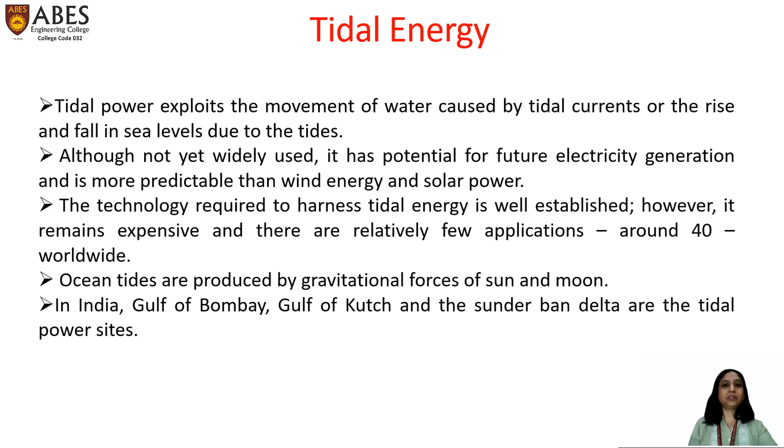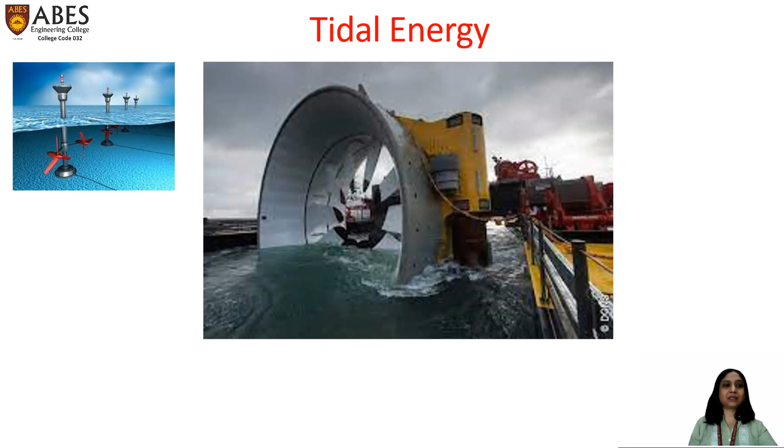The technology required to harness tidal energy is well established. However, it remains expensive, and there are relatively very few applications, around 40 applications worldwide. Ocean tides are produced by the gravitational forces of the sun and moon. In India, the Gulf of Bombay, the Gulf of Kutch, and the Sundarbans are the tidal power sites from where we can convert tidal energy into electrical energy. These are the snapshots. We can see the tides, and we are converting these tides into electrical energy.

As far as the advantages of tidal energy are concerned, very less area is required because they are on bays, and it is free from pollution because it does not use any fuel. Third, it is much superior to a hydropower plant, as that is totally dependent on rain, which always fluctuates from year to year.

As far as the demerits are concerned, tidal power plants can be developed only if natural sites are available. It is very costly also, as the sites are on the bay, which will always be far away from the load center, so the power generated involves more transmission costs. Tidal energy is very costly. The supply of power depends upon the timing of tides, hence it is not continuous. To solve this problem, a double basin with pump storage can be made, but it is also very costly. So in India we are not using it widely, but in future we can use it.

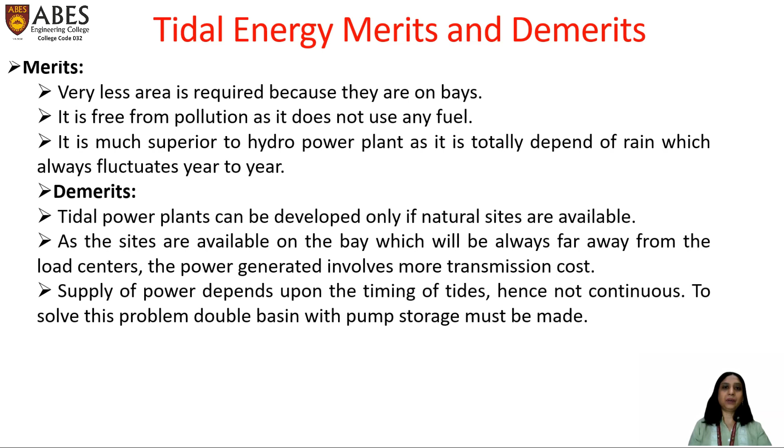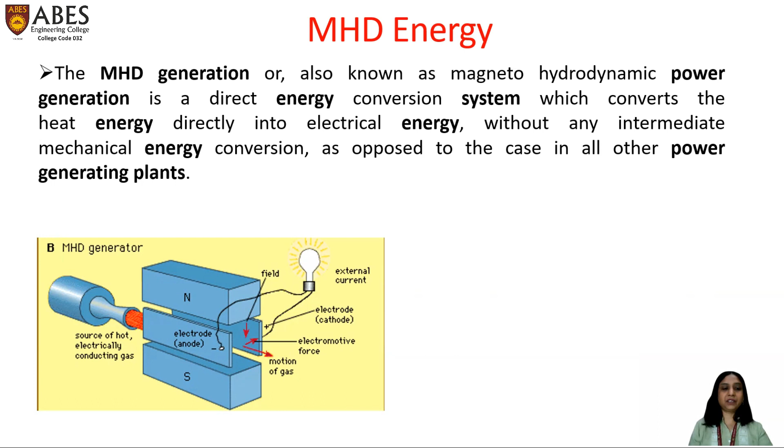The next type of renewable energy is MHD energy. MHD generation is also known as magneto-hydrodynamic power generation. It is an energy conversion system that converts heat energy directly into electrical energy. There is no mechanical device or mechanical energy conversion required in between, so it is very efficient. We can see here the snapshot of it.

As far as the advantages of MHD energy are concerned, as we have already discussed, there is no mechanical device in between. So this is one of the advantages, and it is more reliable. In an MHD system, the efficiency is about 50% as compared to 40% for the most efficient steam plant. As soon as it is started, it can reach the full power level.

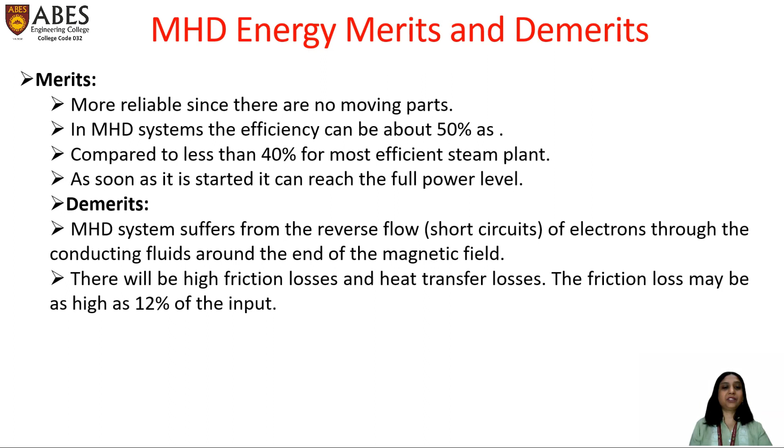But there are certain disadvantages also. It may have the short circuit problem. It may suffer from reverse flow, that is a short circuit of electrons through the conducting fluids around the end of the magnetic field. And there are also high friction losses, around 12% losses due to friction.

The next type of renewable energy is through the fuel cell. A fuel cell is basically an electrochemical cell that converts the energy of a fuel, that is hydrogen, and an oxidizing agent, that is oxygen, into electricity through a redox reaction. Fuel cells are different from most batteries in requiring a continuous source of fuel and oxygen to sustain the chemical reaction. Whereas in a battery, the chemical energy usually comes from metals and their ions, which are commonly already present in the battery, except in flow batteries.

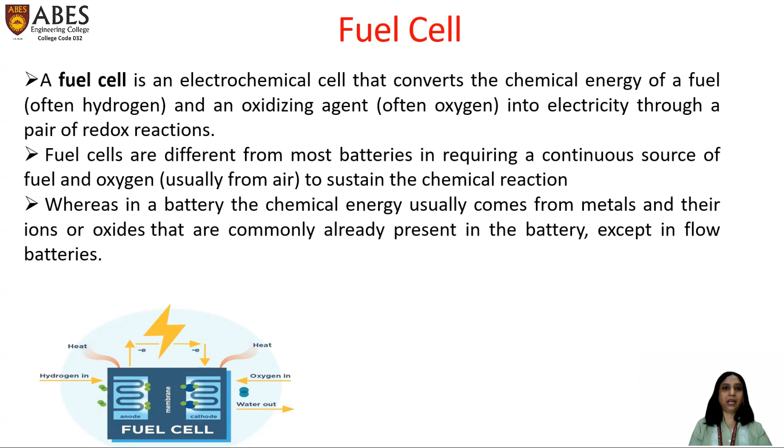So this is a snapshot of a fuel cell. We can see hydrogen is coming in, oxygen is coming in, the redox reaction is taking place, water is coming out, heat is coming out, and that means energy is coming out.

As far as the advantages of the fuel cell are concerned, it has very high efficiency, around 70%, since it is a direct conversion process and does not involve a thermal process. Fuel cells have fewer mechanical components, hence maintenance is also very easy. A fuel cell takes little time to start operation. Demerits are it has a low service life. Initially, the cost is very high. The use of fuel cells is still unsafe due to the explosive nature of hydrogen and oxygen.

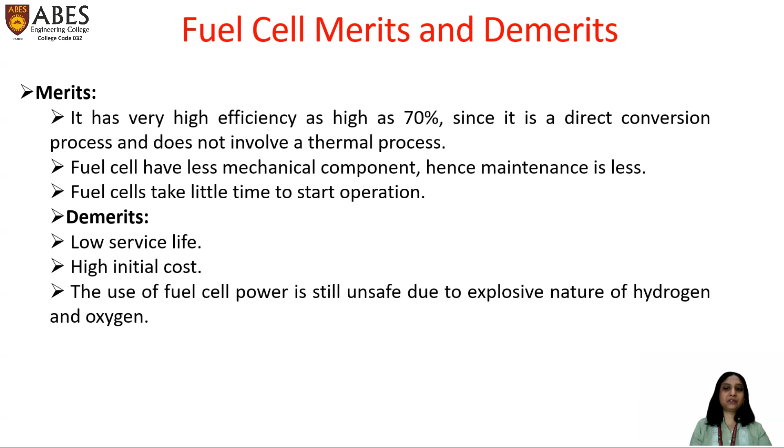The next type of renewable energy is energy from biomass. Biomass is basically animal waste and animal dung, agricultural waste, plant waste, and waste wood products. And we are converting these things into biomass. Through a biomass power plant, we are getting energy which is used as electrical energy.

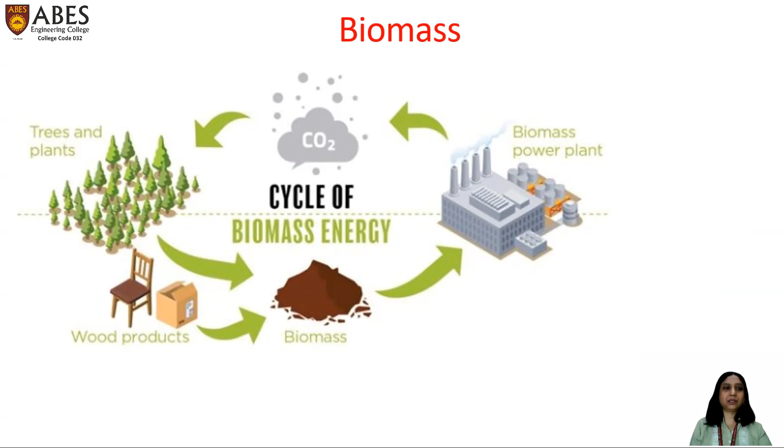We can see here in this diagram, a lot of carbon dioxide emission is there in case of biomass energy, but it is abundantly available. So biomass is basically organic material made from plants and animals. It is a renewable energy source because we can always grow more trees and crops, and waste will always exist. It does not include fossil fuels, which take millions of years to create.

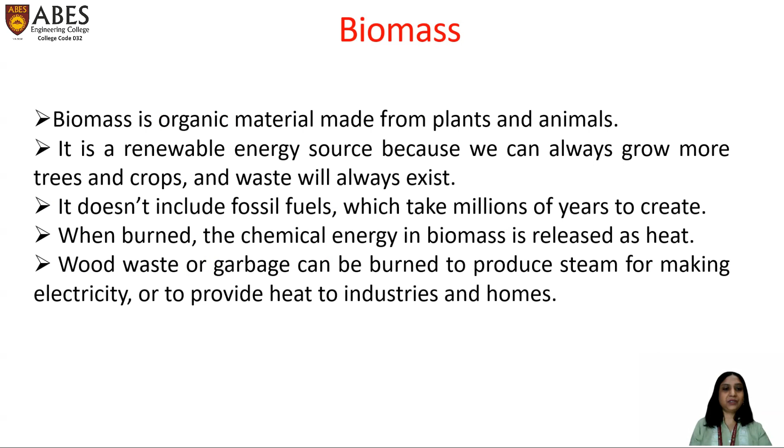When burned, the chemical energy in biomass is released as heat. It is clear from the previous diagram. The wood waste or garbage can be burned to produce steam for making electricity or to provide heat to industries and homes. So biomass plants are there which are doing this particular work.

The biomass plant is a device for conversion of fermentable organic matter, in particular cattle dung, into combustible gas and fully matured organic manure. The main sources for production of biogas are cattle dung, night soil, poultry and piggery droppings. These materials are confined in a place out of contact with oxygen, and it gives rise to a large number of bacteria which convert carbohydrates and proteins into volatile acids and carbon dioxide. Biomass is organic matter derived from plants, algae, animals, etc.

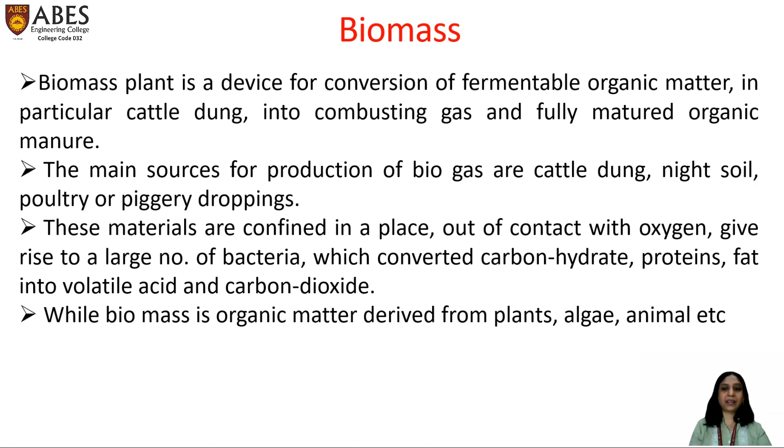And advantages and disadvantages of biomass. Advantages: the cost of obtaining bioenergy through plantation is less than the cost of obtaining energy from fossil fuel. Plants ensure a continuous supply of energy due to their continuous growth. Combustion of biomass does not cause sulfur pollution, because in vegetables even less than 0.1% sulfur is there.

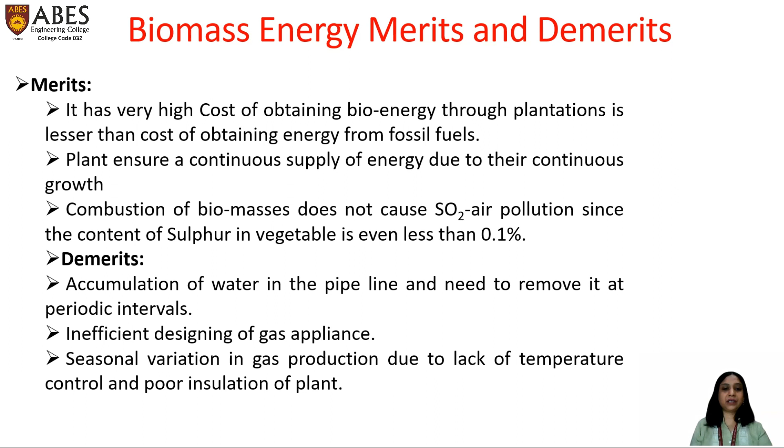Demerits are accumulation of water in the pipeline and the need to remove it at periodic intervals. Inefficient design of gas appliances can be a problem. Seasonal variation in gas production due to lack of temperature control and poor insulation of plants is also a problem.

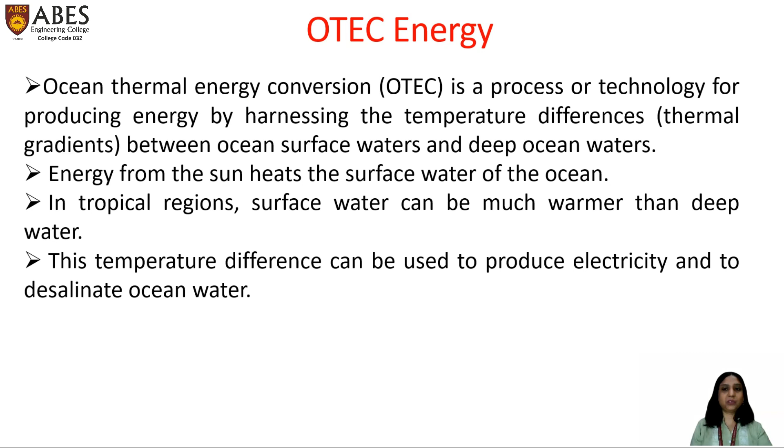The next type of renewable or non-conventional energy is OTEC energy. This is basically ocean thermal energy conversion. It is a process or technology for producing energy by harnessing the temperature differences between ocean surface and deep ocean water. Energy from the sun heats the surface water of the ocean. In tropical regions, the surface water can be much warmer than deep water. This temperature difference can be used to produce electricity.

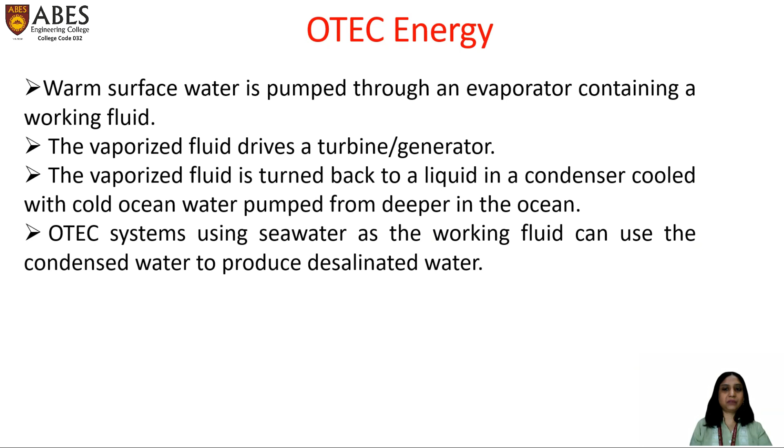As far as the advantages and disadvantages are concerned, the cost of obtaining energy through OTEC is less than obtaining energy from fossil fuel. The OTEC process exploits the temperature difference between the warm surface and cold bottom water to produce electricity. Disadvantages of OTEC: at greater distance, the transmission cost of electricity is increased. OTEC plants have several limitations and techno-economic constraints, hence their commercial prospects are quite uncertain. Third, the plant is subjected to ocean streams and high waves, so it is subjected to very high stresses.

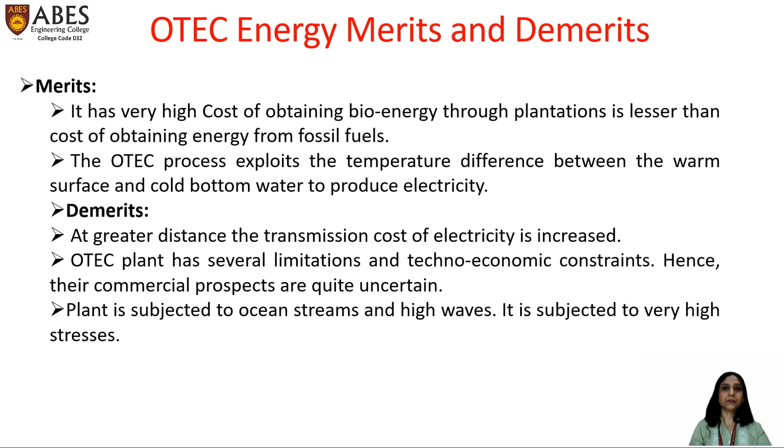The next type of non-conventional energy is geothermal energy. Geo means the earth and thermal means heat. That means heat from the earth is converted to electrical energy. There is a hot water reservoir under the earth, and that heat is converted to electrical energy. Geothermal energy is derived from high temperature geothermal fluids. This can be utilized for power generation and thermal applications like greenhouse cultivation, hot water irrigation in cold countries, cooking, process heat, and electrical power generation.

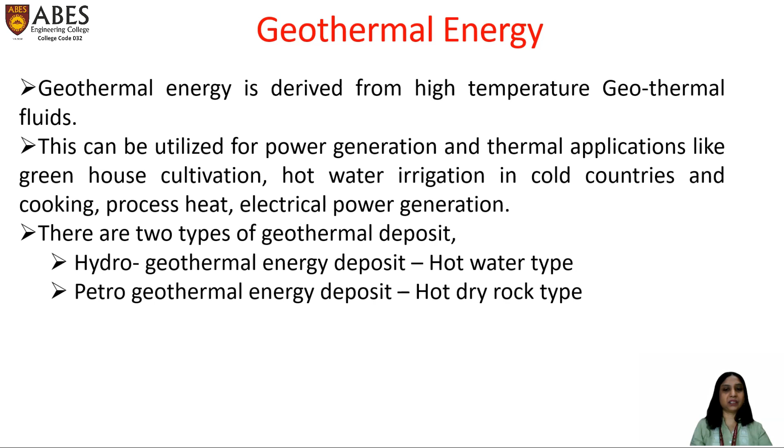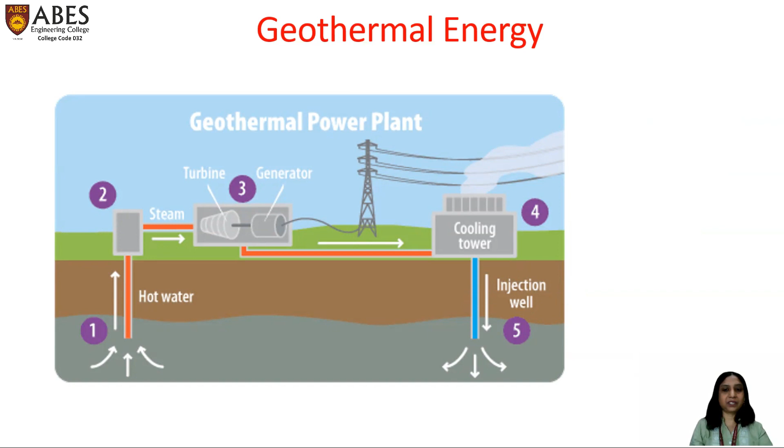There are two kinds of geothermal deposits. One is the hydrogeothermal deposit, the hot water type, and the second is petrogeothermal, the hot dry rock type. Both can be converted to electrical energy. And this is a snapshot of a geothermal power plant. We can see the hot water reservoirs beneath, and these are converted to steam. The turbine is there, the generator is there, and then it is converted to electrical energy.

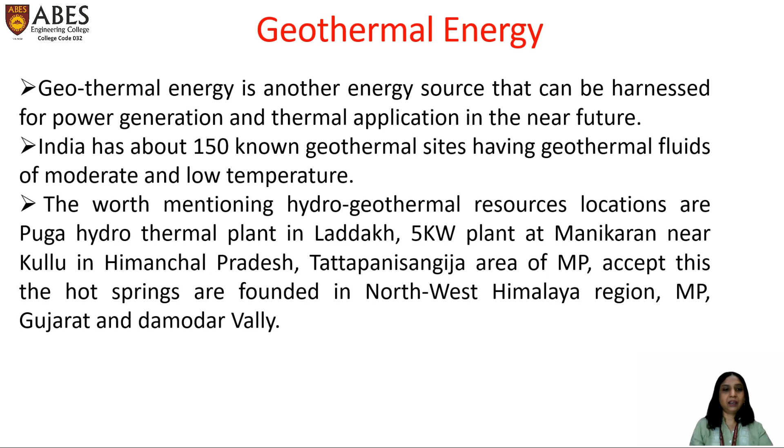Geothermal energy is an energy source that can be harnessed for power generation and thermal applications in the near future. India has about 150 known geothermal sites having geothermal fluids of moderate and low temperature. Worth mentioning hydrothermal resource locations are Puga hydrothermal plants in Ladakh, a 5 kW plant at Manikaran near Kullu in Himachal Pradesh, and the Tatapani area of MP. Besides this, hot springs are found in the northwest Himalaya region, MP, Gujarat, and Damodar Valley.

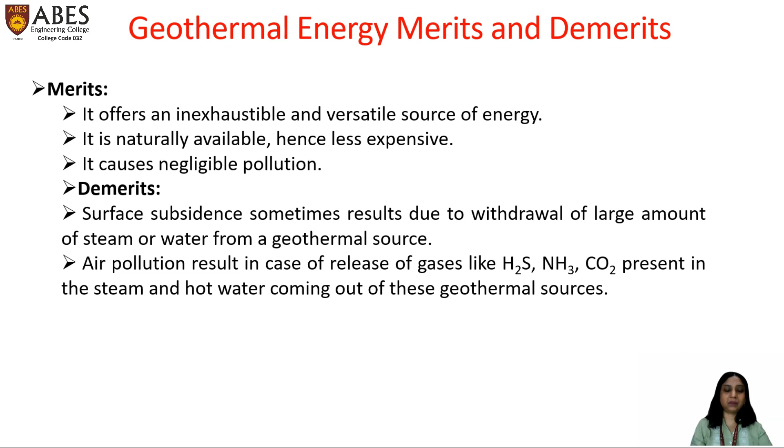As far as advantages are concerned, geothermal energy offers an inexhaustible and versatile source of energy. It is naturally available, it is very inexpensive, and it causes negligible pollution. The disadvantages are surface subsidence, sometimes resulting from withdrawal of large amounts of steam or water from geothermal sources, and air pollution from the release of gases like H2S, ammonia, and CO2 present in the steam and hot water coming out of the sources.

So we have discussed all types of renewable energy, also called non-conventional energy resources as per the curriculum. In the next slides, we will be discussing how solar cells work, and the working of PV cells and arrays.